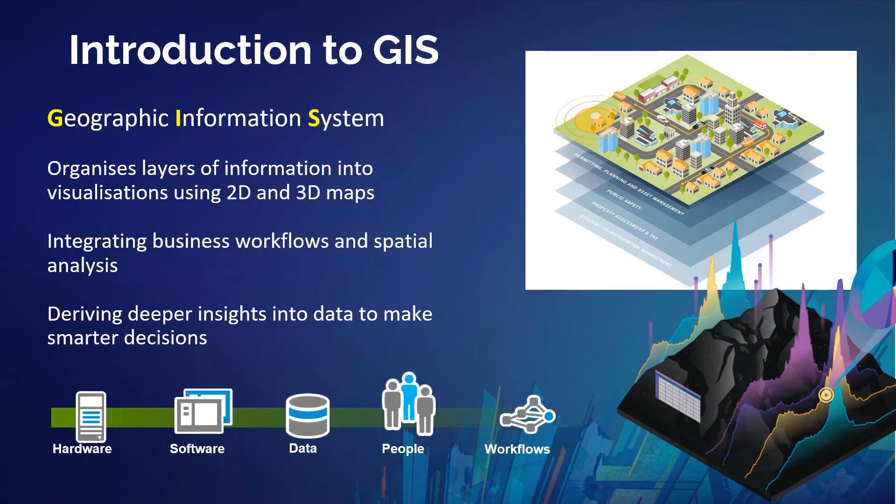Some of the applications commonly seen within GIS, I've listed out here. Of course, it's not limited to this list—it's only limited by your imagination and what you can do with your data. But these are the very common ones that we see.

How do we identify problems using patterns and trends? How does your data correlate to each other spatially, and how can they form patterns within the spatial space? From there, you're able to understand various trends from your data, whether more incidents are congregated into a single space next to each other, and whether incidents may be spreading across a space as well. So you're able to identify problems by analyzing and visualizing the patterns and trends, and thereafter understand what are the contributing factors that may have caused such a trend or pattern to occur.

After identifying areas that may indicate problems, that's where you probably need to prioritize efforts to solve that problem. For instance, looking at crime incidents within a certain area in Singapore, you may find that certain hotspots have higher incidents or occurrences of a certain type of crime. That's where you need to probably deploy more police officers to patrol the area so you can reduce those occurrences of crime. So that's one very common application that we see.

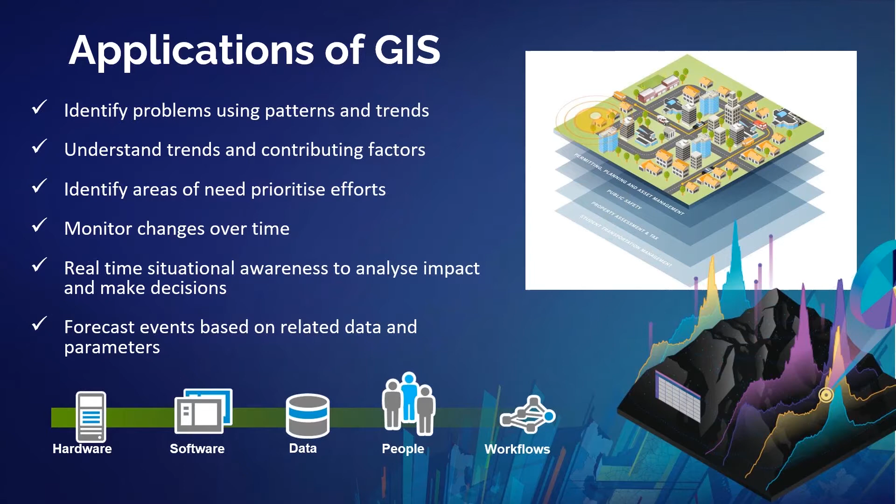So I'm going to hand over now to Pratibha, who will be talking a bit more about BIM.

Hello everyone, I'll be giving you a quick introduction about BIM, what BIM is and what is GeoBIM. I think we all know that BIM stands for Building Information Modeling, and BIM is an intelligent 3D model-based process that gives AEC professionals the insights and tools to more effectively plan, design, construct, and manage buildings and infrastructure. So basically, everything starts with a 3D model, and then you start inputting the information inside the model.

We all know that the type of information always underpins the quality of a BIM model, and information is always the key thing for a BIM model throughout the life cycle of a project. So whatever information or intelligent input you key inside the BIM model, then after that you can take out a lot of information from that model throughout the different stages of your project. It can be specifications, building analysis, production details, schedules, quantity takeoff, clash detection, 3D visualization, and also 2D drawings. So basically, a BIM model will be a consistent, coordinated, and computable output of a 3D model.

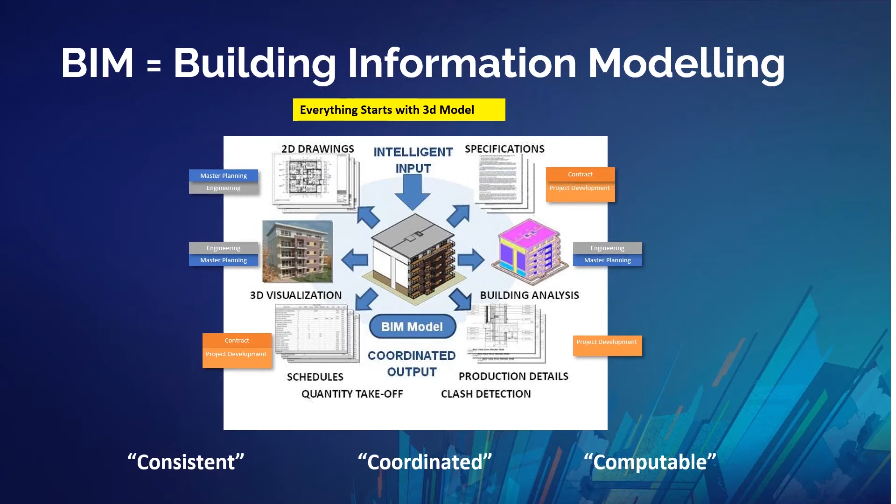So basically, BIM is Building Information Modeling, and we all know that information is very important in that. Normally people feel that BIM is only a 3D model, or only a software product that you use one or two software to create. But actually, BIM is a process involving the generation and management of the digital representation of physical and functional characteristics of a building. It's not only a software, but a process which helps you drive the setting up of modeling standards to implement and monitor, and the end product which you get from BIM is a 3D model.

Nowadays, projects are getting more complicated and more stakeholders are getting involved in one project, so there is a requirement for integrated project delivery. Initially, in the traditional project delivery, there would be an owner dealing with the architect and then the contractor, and under the contractor would be subcons or subsystems. Then under the architect would be structural or MEP engineers.

But now, because of the need of the time today, we need to start working with a shared model, and that's why we work with the BIM model. BIM model is always an integrated project where you can input the information and take out the information from the model, whether you are an owner, architect, or structural engineer. So in the end, there is a coordinated output, as we already said.

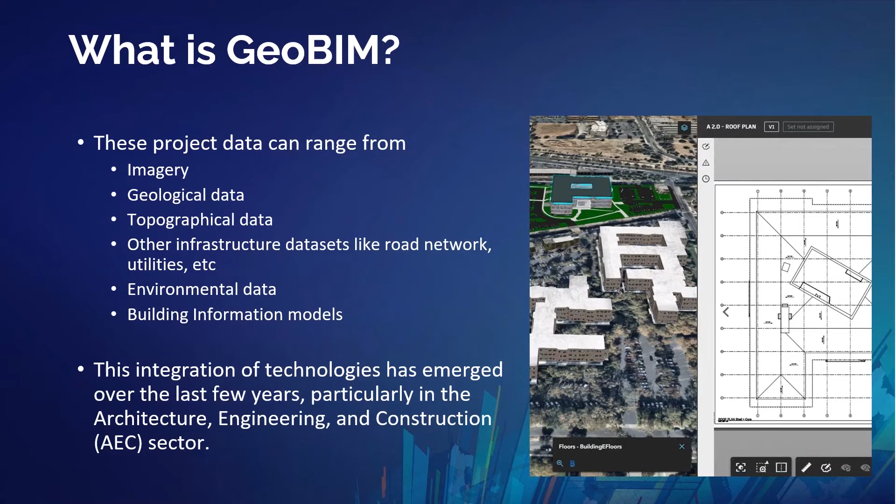Now the most important question is why BIM GIS integration is required. BIM GIS integration will help you make anything with the science of where. As we say, BIM is about making anything, and Esri GIS is the science of where - where you want to build. So BIM offers detailed 3D visualization and the ability to organize huge volumes of data related to buildings.

GIS is highly customizable, well equipped for analysis, and ideal for projects in a multi-site or spatially distributed environment. While BIM is best suited for managing data related to the building itself, GIS is more applicable for everything outside the building. So now you can even do macro and micro analysis using GeoBIM.

Now Sharon will give you an introduction about the workflows. As Pratibha mentioned earlier, how GIS and BIM can work together is mainly through the transfer of data between the two different technologies.

So how GIS and the analysis of surrounding areas are able to support the BIM process, and vice versa - that is the key way in which GIS and BIM work together, and that's what the whole GeoBIM practice is about: integrating data coming in from GIS into BIM, and then vice versa from BIM into GIS. So imagine in a planning process of your building life cycle, you want to determine the buildable area within which you are able to build.

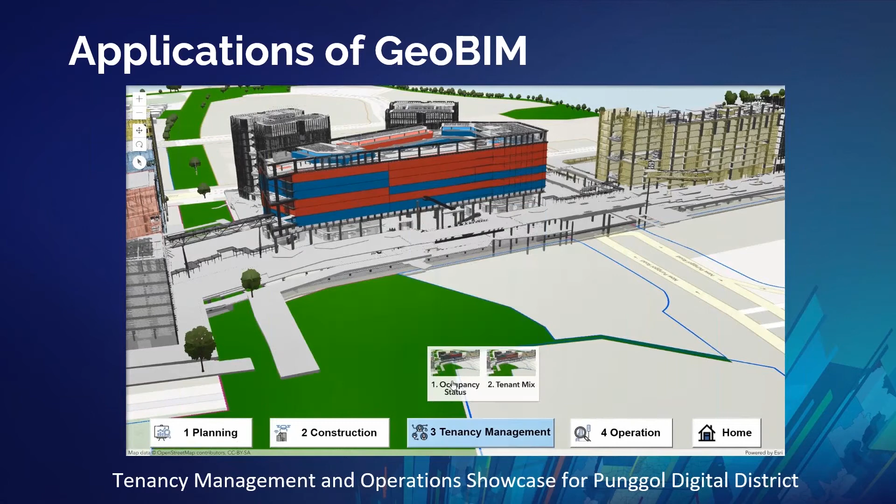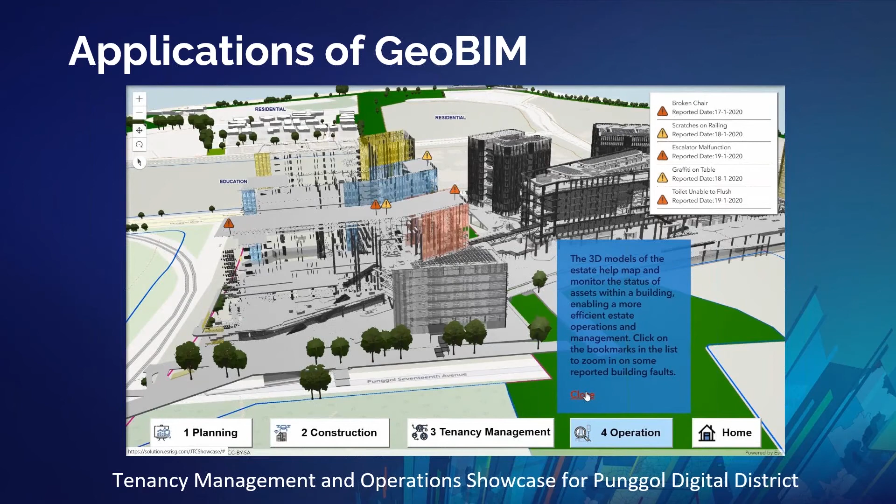Now we're going to cover some applications of GeoBIM. Here we're looking at a building and the different tenant mix within it. For tenant management, facilities owners want a good ratio of different tenants coming into the estate. This helps them visualize that and identify areas where they may need to attract different kinds of tenants into the building.

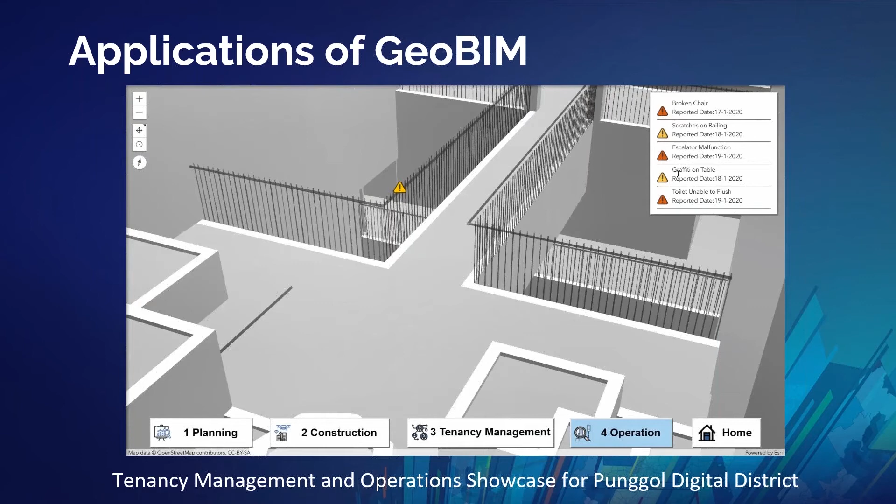Another area is operations, where you can tag a certain incident or faulty equipment within the building directly to that asset in the BIM model. This helps identify where all these faulty assets are, so facilities management officers can find their way to them and fix those problems quickly.

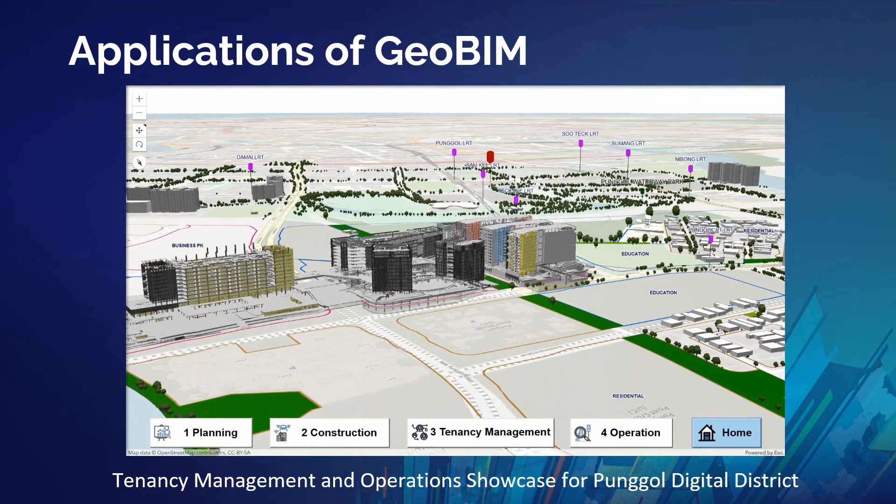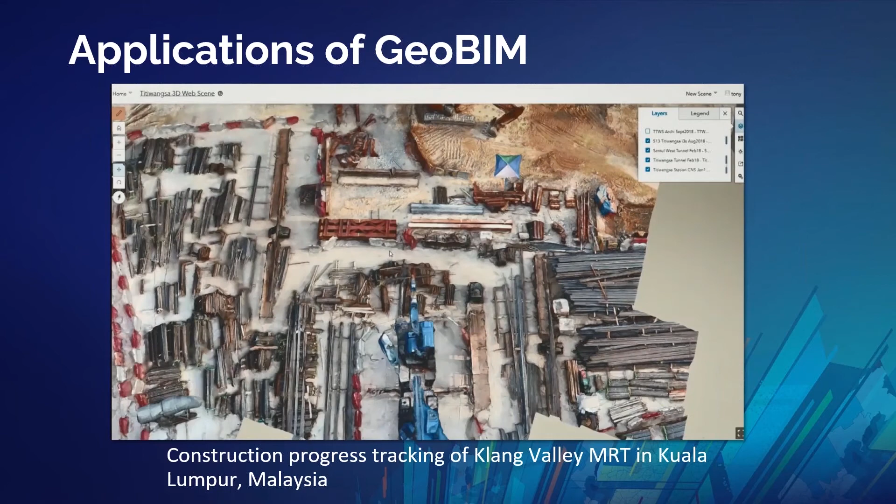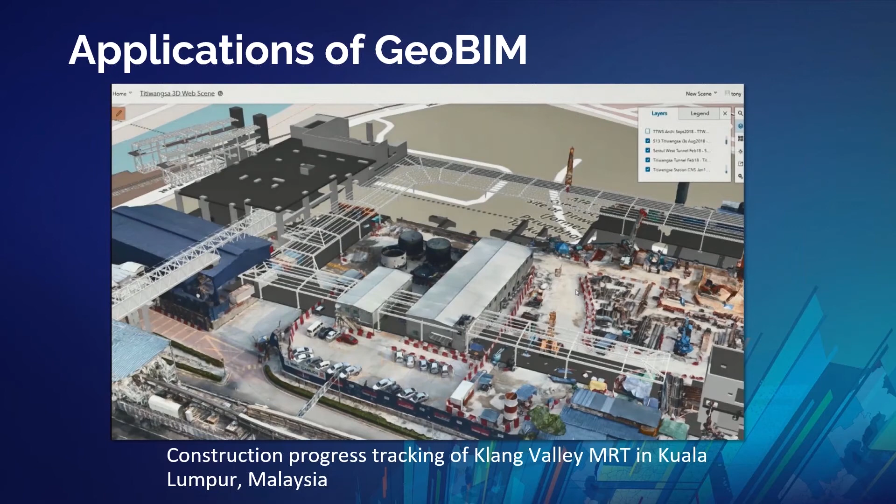In the area of construction, here we see a BIM model overlaid on top of a drone image, a 3D scan of the construction site — very high resolution drone imagery. GIS can ingest this 3D scan within the platform and bring in the BIM design together, so you can check if what's being constructed is in line with what's planned, whether there are delays requiring more resources to meet project timelines, or whether construction matches the design.

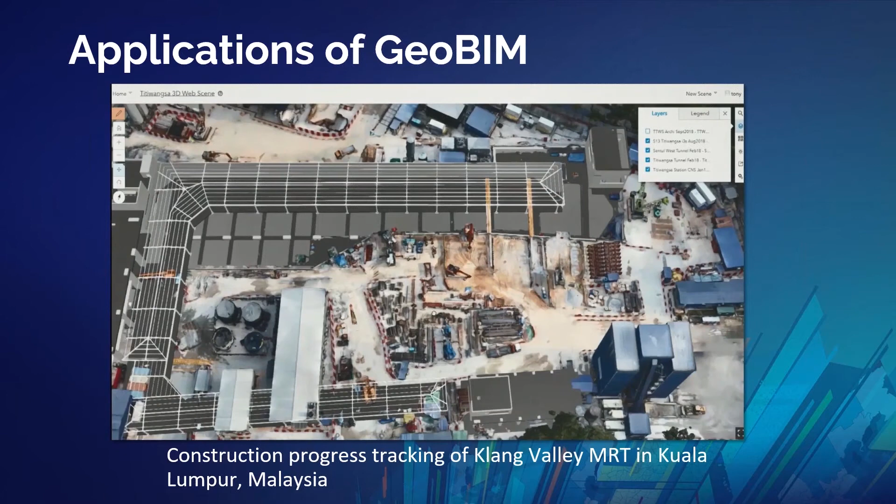In this emerging technology area of AR and VR, the GeoBIM concept is also applied. What you see here is a VR representation of a new possible building, where you can look at how the sun may cast a shadow on it and get a first-person view from the ground. It's a great use of technology to showcase to stakeholders what this new building will look like once constructed.

In the area of AR, you're also able to bring your plans to the actual site, so you can visualize it and place the relevant markers you require before starting any construction works.

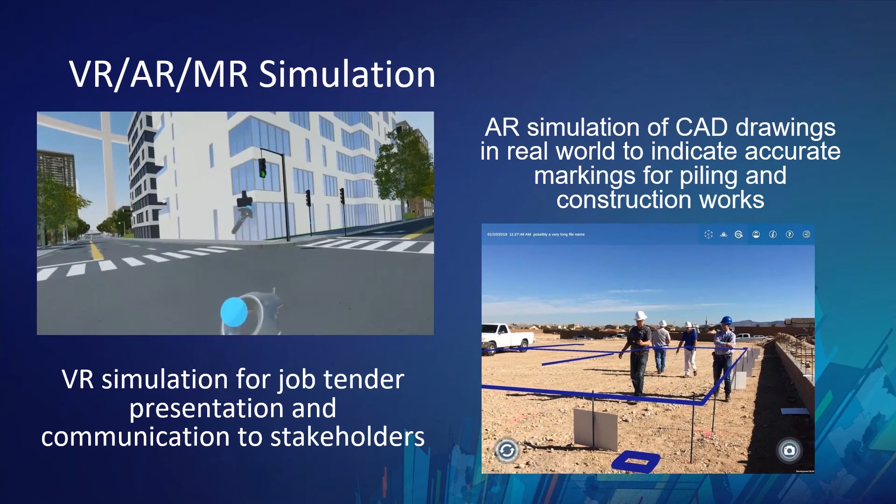In summary, GIS and BIM as a technology practice can be applied in all four stages of the building life cycle: plan, design, build, and operate. It removes the old way of working where GIS and BIM remain in separate technology silos. We bring those two together to help improve collaboration between various teams and accelerate design decisions.

It also helps you communicate better to stakeholders when there's a 3D digital twin of different sets of data within a single platform. It helps you communicate your concepts and designs to your stakeholders. It also helps accelerate regulatory approvals, and it helps reduce risk of data loss, where you're able to maintain all your data across the entire project cycle. It also improves operational efficiency, being able to visualize assets within that building information model.

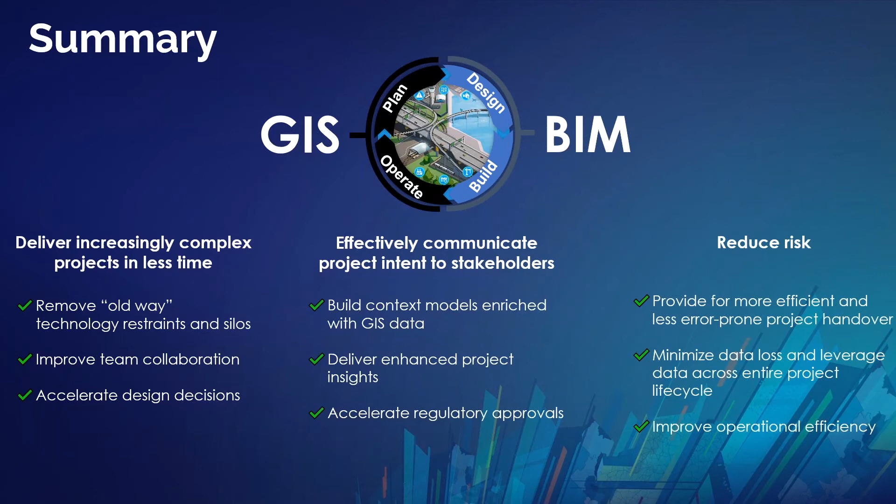So we are pushing out the GeoBIM certification course, as one of our aims is to improve our ranking of GeoBIM readiness in the world.

I'd like to cover some FAQs you might have in relation to this GeoBIM certification course. You might want to know, do I need to know Esri software or Revit before I can sign up for this course? There are no prerequisites required for this course. It is an introductory basic course, so you do not need to know ArcGIS Pro or Revit, although it would be beneficial to know either one of them. But if you have zero knowledge, you're still welcome to join us. We'll be covering the very basics of both softwares within this course.

So what are the skills you can expect to get out of this course? As the name suggests, there's basics of GIS that you will learn, and basics of BIM that you will cover as well. And then, of course, the combination of these two technologies, which is GeoBIM, and how it can be applied in real-world scenarios at various stages of the building life cycle, we will also be covering. It is also a hands-on course, so you'll be expected to do exercises, and there will be a scenario we've crafted out for you where you'll be able to see the real-world application of a GeoBIM concept.